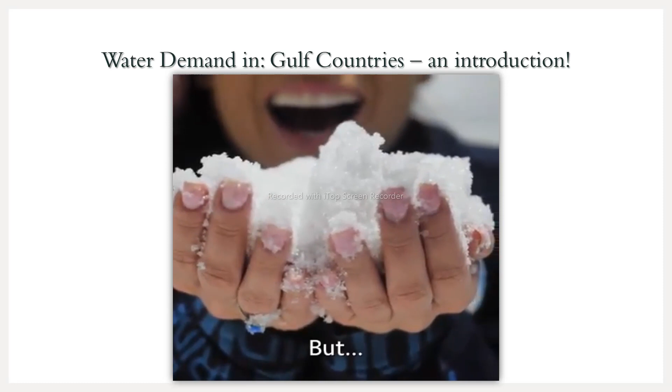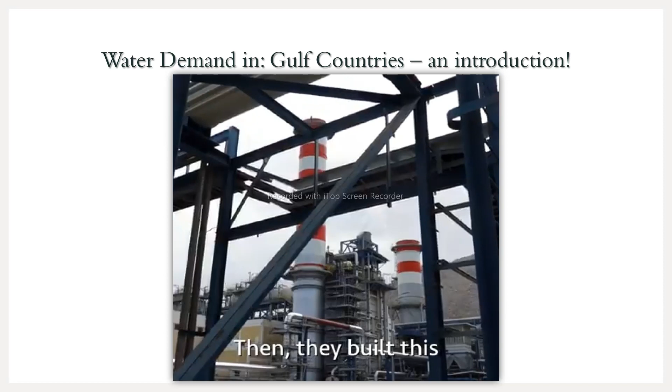This isn't just the Emirates. 99% of the world's water cannot be drunk. It's just too salty or too frozen. But for the first time ever, I want to show you the step-by-step process of how this country found water. The first thing they did is collect the only water they have, ocean water. Then they built this: tens of factories that specialize in one thing, removing salt from water. They take the ocean water, pressure it, and put it through a filter that does not allow salt to enter. Salty water goes in here, and fresh water exits from here.

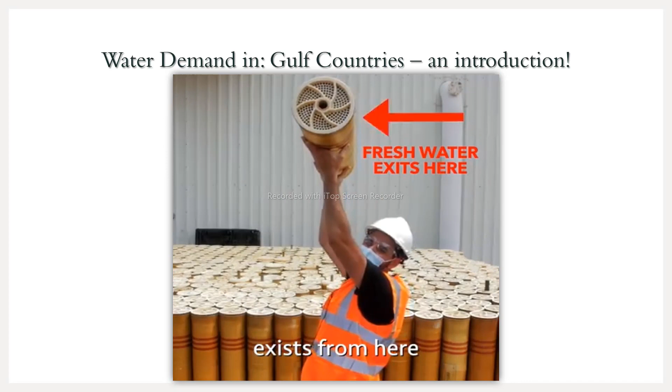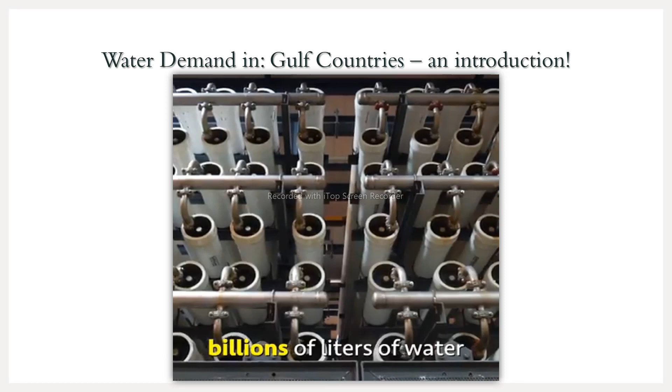This is a crazy complicated process. Every day, not thousands, not millions, billions of liters of water are cleaned this way, entering salty and leaving clean. Now, 90% of the entire country's water comes from the ocean. It is the highest in the world. We're here at a farm in the middle of the desert, and I have this. This water came straight from the ocean and was desalinated in the process, and now you can use it to feed the animals, feed the plants, and it's very cool, very warm, and very drinkable.

That's magic! The next thing they did is even crazier. Instead of cleaning water, they created new water. And this is a true story: they sent planes all the way to the clouds and released salt in the air. They have a lot of it. Because of the salt, the clouds grow bigger and bigger, and eventually they rain fresh water into the country. This is called cloud seeding, and in 2017, they did it almost every single day.

And when that water falls to the ground, they catch it. All the rainwater they collect here by building a huge dam, and this fresh water is what keeps the people alive. I don't think people appreciate this enough. This water is fresh water, rainwater, that was supposed to go to the ocean and become salty. But they caught it before it went to the ocean in the middle of a dam, and they made this lake. Most importantly, you can drink this water.

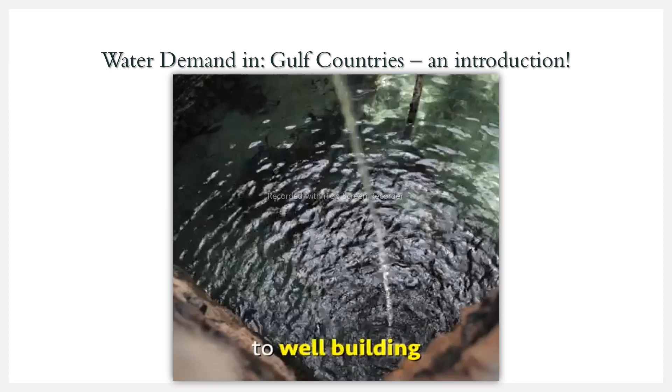From desalination to cloud seeding to dam building to well building, humans are doing the impossible just to find water. And the big idea here is simple: if we have to go and seed clouds and do all this complicated stuff, the least we can do is save water when we can and turn off that water sink.

Okay, so in that video we saw many concepts. I think the audio was audible to everyone. So one concept they told about is cloud seeding.

So where you don't have to treat the water, right? You can directly harvest the water from clouds. There are basically two types of water treatment. That's why the name of the course is water and wastewater treatment. Water treatment comes if you consider a chemical plant or any other plant. Before using the water into that plant, the water must be treated. Mostly the hardness is removed, the saltiness and the ions present inside the water, and also big particles present inside the water are removed. That is your preliminary water treatment.

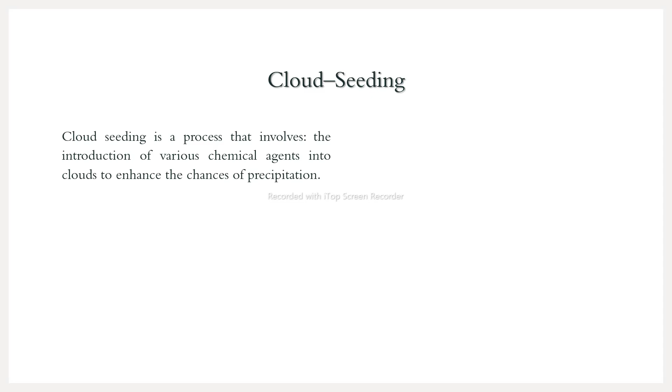So in that video, we saw a thing about cloud seeding. So I'll just ask you a question regarding this. The cloud seeding process is a process that involves the introduction of various chemical agents into clouds to enhance the chances of precipitation. That is your raining.

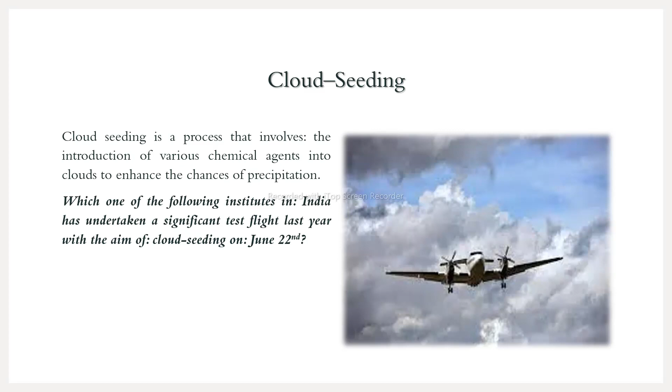So which one of the following institutes in India has undertaken a significant test flight last year with the aim of cloud seeding on June 22nd? Option A is IIT Bombay, option B IIT Kanpur, option C IIT Roorkee, and option D IISc Bangalore.

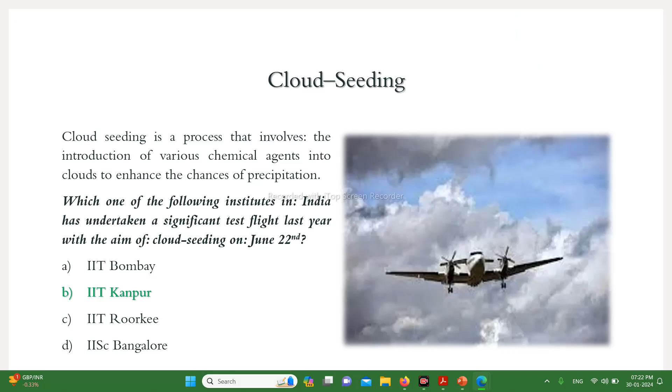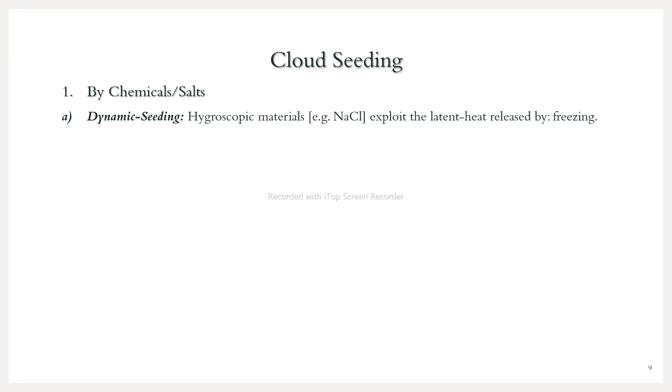So we'll go to our next slide. There is a little bit of information regarding cloud seeding. So it can be done by various processes. One is by chemicals or salts. Within the chemical or salt cloud seeding, there are dynamic seedings, static seedings, and it can also be done by electric charges.

The electric charge technology is what the UAE is using commercially from 2021, though they introduced this technology back in 2017. From 2021 they started regular usage. In this process, drones equipped with payload of electric charge emission instruments and customized sensors are used, flying at low altitudes and delivering electric charge to air molecules for precipitation to occur.

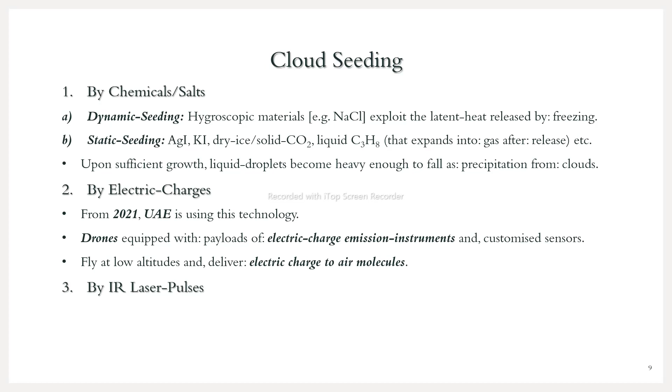Another process is called the IR laser pulse process for cloud seeding. In this process, an electronic laser-assisted water condensation mechanism is directed to the air above. It was first tested in Germany's Berlin in 2010 by researchers of the University of Geneva. These infrared laser pulses encourage atmospheric sulfur dioxide and nitrogen dioxide to form particles acting as seeds, which is why it's called cloud seeding.

The chemical or salt seeding is the most common method. In dynamic seeding, hygroscopic materials, like common table salt, are utilized to exploit the latent heat released by freezing. In static seeding, chemicals like silver iodide, potassium iodide, dry ice (solid carbon dioxide), and liquid propane are used, which expand into gas after release. This way the chemicals are used for cloud seeding. Upon sufficient growth, the liquid droplets become heavy enough to fall as precipitation from the clouds. These are just a bit of information.

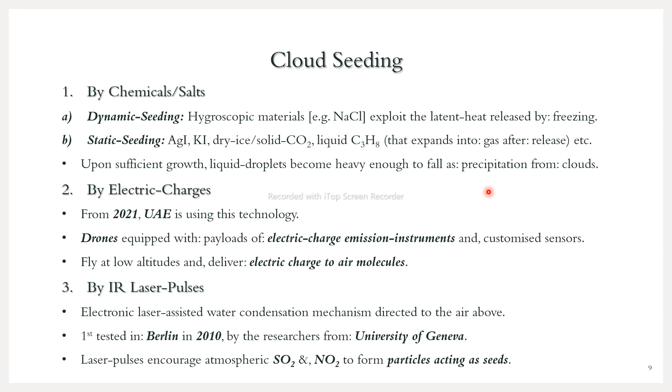So in that video we saw, they told that if we drink too much salty water, you will get dehydrated, right? Salt is also important to maintain the sodium potassium balance of our body, but at the same time the concentration must be tuned to prevent dehydration. So there is a question: which one of the following processes is responsible for getting dehydrated by drinking salt water?

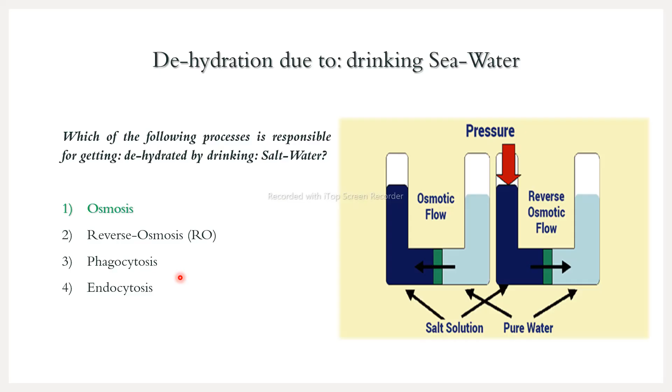But osmosis is the natural process - most of you answered it correctly. So if you put a cell, how does it get dehydrated? This is the natural phenomenon of influx and outflux of water in cells. If water comes inside the cell, it is called pinocytosis. If solid products come inside the cell, this is called phagocytosis. Both are called endocytosis processes, which are in the options. If something, either water or solid, goes out of the cell, that is called exocytosis, just like our excretion process in the human body. So the cell also drinks water, eats solid products, and excretes excretory materials. So what happens if the cell is kept at a higher concentration?

Let's assume it is the membrane or wall of the cell, and let's assume it to be semi-permeable. If the concentration of the outside environment, the salt or sugar concentration, is more than the concentration of the cytoplasm, that is the liquid present inside the cell, then this type of solution is called a hypertonic solution with respect to that cell.

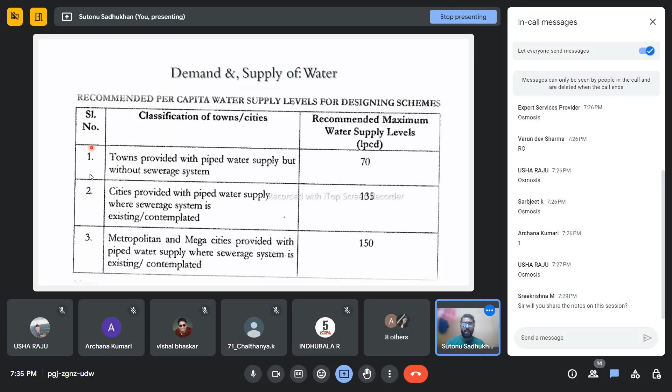Recommended per capita water supply levels for designing schemes is given below. As this is the first session, all the content shared is related to general water treatment processes, and it may not be in a very hard and fast way related to the content you solve in exams or weekly assignments. These are a bit light-hearted, but related to water treatment, and everything will be shared with you, so you don't need to take notes.

Now we'll solve this problem. In the left hand column, classification of towns and cities is given, and in the right hand column, the recommended maximum water supply levels are given, in LPCD, that is liters per capita per day. Number one is towns provided with piped water supply but without a sewerage system. For this type of town, the recommended maximum water supply level is 70 liters per capita per day.

Option 2 is cities provided with piped water supply where a sewerage system is existing or contemplated. This is just an example, not generic data, just provided for solving the problem. For this second type of city, the recommended level is 135. The third type is metropolitan and mega cities provided with piped water supply where sewerage system is existing or contemplated, where the water supply level is 150 liters per capita per day.

You can see the recommended maximum water supply level is gradually increasing as the water treatment and supply facility of the town improves. I mean, the more developed the water treatment facility of the town is, the higher the recommended level of water supply, right?

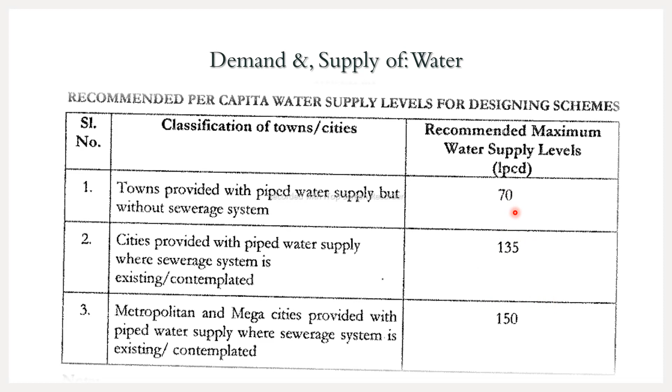So now this is the data provided. Now you have to answer. So the questions will be as follows. So here the type of city is mentioned. City is provided with piped water supply where sewerage system is existing. That means your second type of city, right?

Then the population for a community is provided as 8,000. The source of water is provided as surface water. The characteristics of water to be treated is only suspended and bacterial impurities present inside the water. And the number of working hours of the treatment plant is provided as 18.

Now the questions are, you have to determine the total water demand, water to be sent for treatment, and treatment train with membrane processes. That is, if you use membrane to treat the suspended and bacterial impurities present inside the water, what will be the type of the treatment train with the membrane processes?

And lastly, you have to decide the number of modules required if the flow rate per module is 120 liters per hour, LPH. So there are two units, LPCD, liters per capita per day. Per capita means per head, and liters per hour.

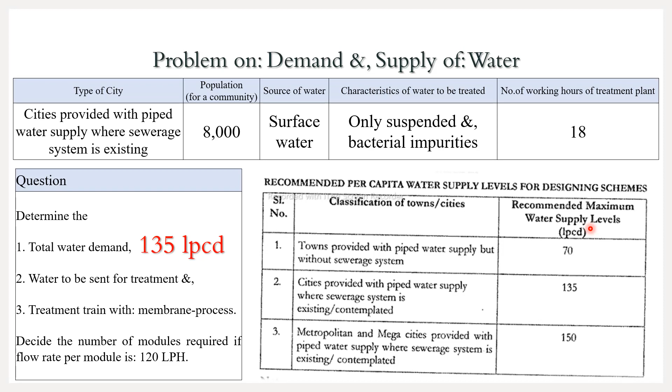So next question, question 2, is water that is to be sent for the treatment. So the total water demand in liters per day. So is anybody calculating? I will wait for you to answer.

So the total water demand in liters per day will be population for a community into per capita demand. So per capita demand is 135 LPCD, liters per capita per day, into 8,000, which is the population for the community. So per capita actually goes out and it becomes liter per day only. You can convert into MLD, that is megaliters per day, by dividing it with 10 to the power 6. So that will be equal to 1.08 MLD, megaliters per day, right? Okay.

Before solving the other questions, we will look into the membrane process characteristics. As stated in the questions, only suspended and bacterial impurities are present inside the water. So to understand what type of membrane treatment to use, we have to look at the different types of membranes and their uses.

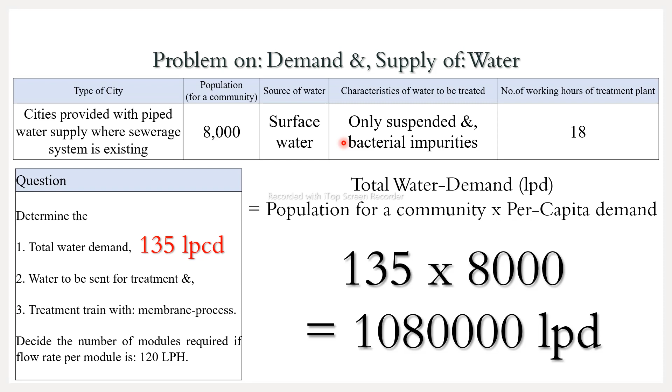Membrane types are basically determined by their porosity. Membrane pores can be in the micro range, ultra range, nano range, or RO range. The term nano means 10 to the power minus 9, and micro means 10 to the power minus 6. Microfiltration membranes have a pore size of around 10 to the power minus 5 to 10 to the power minus 7 meters.

Nanofiltration pore sizes range from 10 to the minus 7 to 10 to the minus 10 meters, that is 1 angstrom. For reverse osmosis membranes, the pore size is below 1 angstrom, or 1 angstrom or below. Ultrafiltration lies in between microfiltration and nanofiltration. Depending on their pore size, their rejection is decided.

The larger bacteria and suspended solids get separated in the microfiltration process. Viruses, bacteria and suspended solids are separated in the ultrafiltration process. So viruses are not separated in microfiltration — if present in the water, you have to use ultrafiltration.

If you want to separate multivalent ions — divalent ions, trivalent ions, etc., like calcium chloride, calcium sulfate, magnesium chloride, magnesium fluoride, magnesium sulfate — these are all bivalent ions, and they cause the hardness of the water.

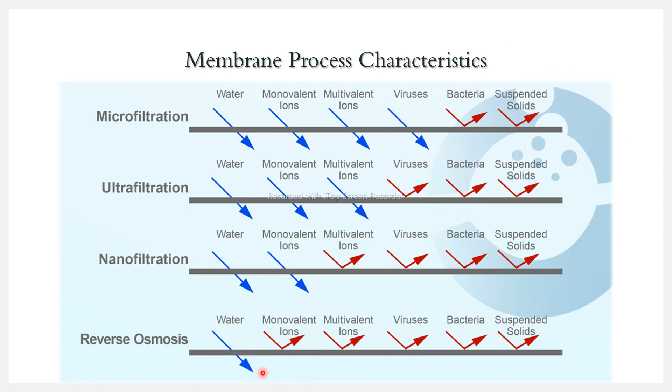Valent, I think you understand pretty well — those with a science background will understand it. But for the general public's sake, we'll discuss these things a little later. Reverse osmosis actually separates all of the things from the water, and only pure water with a very low amount of impurities comes out.

So these are the membrane process characteristics. Now we will be returning to our problem.

We have seen the total water demand is 135 liters per capita per day, and the population for the entire community is 8,000. As per the water balance, as discussed in the week's lectures, the water that goes in also goes out — it will not just vanish. That's why the people will be consuming this water.

If you multiply them, that amount of water will be going for treatment — whatever they consume, the same amount of water is to be treated. If you consider a zero liquid discharge facility, and water is discharged, then makeup water must be taken into the picture. Otherwise, it is not required.

Even if you are not utilizing that water, there are environmental norms that you cannot directly throw used water into the environment, because it will cause harm to aquatic life. That's why it must be treated. Now you have to choose the treatment train with the membrane processes.

Here the source water contains only suspended and bacterial impurities. So can anybody tell what type of membrane we have to use?

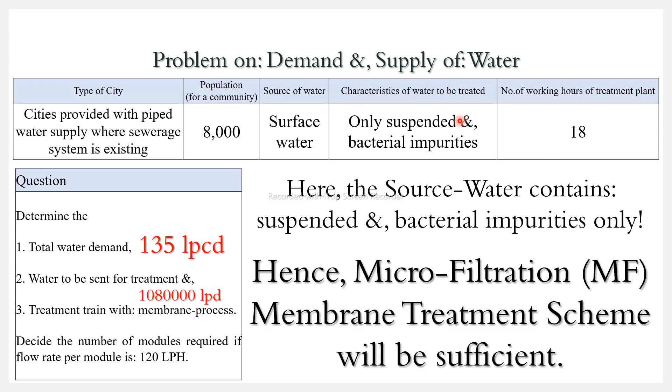So here microfiltration membrane treatment scheme will be sufficient, right? Why we will not use all the things? There are only suspended and bacterial impurities present inside the water, right? So suspended solids and bacterial impurities are present inside the water. Why we will not use ultrafiltration, nanofiltration, or RO, just like the expert service provider said? Why you will not use RO even? So why is microfiltration sufficient here? Can anyone tell this thing?

Unmute yourselves and tell this thing, because all of the processes, ultrafiltration, nanofiltration, and reverse osmosis, as you have correctly said, they separate the bacteria or suspended solids. But why are we selecting only microfiltration here? Any insights?

Okay, no one is coming forward. People are only concerned with things those are specifically in whatever sir told. Not outside that, no one will say anything.

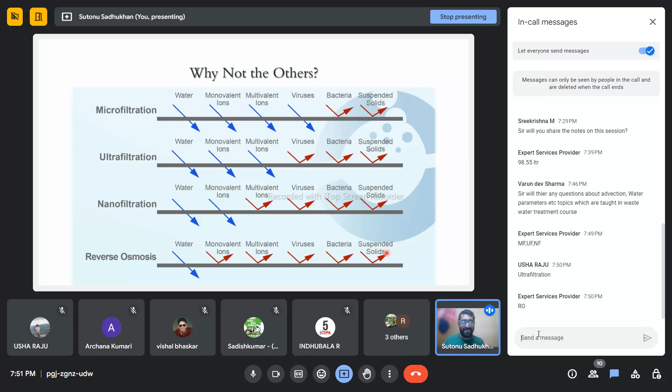Okay, so the reason is that all of the processes basically separate the bacteria and suspended solids, but the other processes, ultrafiltration, nanofiltration, and reverse osmosis, have finer pores, right? So to pass the wastewater through these pores requires higher pressures than microfiltration. Higher pressure means higher energy, that means higher pumping cost, right? And also the fabrication of UF, NF, and RO membranes is costlier than MF membranes. So that's why both the capital costs and the treatment costs, because of the energy consumption, go higher in case of ultrafiltration, nanofiltration, and reverse osmosis. That's why we will use only microfiltration in treating our water, where the characteristics of water to be treated have only suspended solids and bacterial impurities present.

If it was told that also viruses are present, then we would go for ultrafiltration. If they told that we have to separate the bivalent ions also present inside the water, or the hardness measured in terms of calcium carbonate in the water is more than the permissible limit, then we would go for the NF scheme also, that is nanofiltration. But as only suspended solids and bacterial impurities are there, for economical reasons, we will only use the microfiltration scheme.

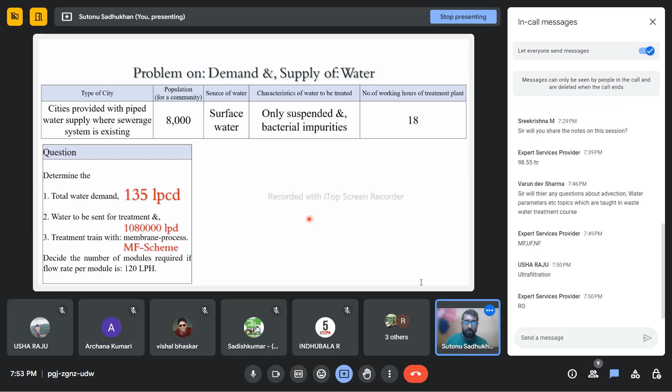Now the last problem of this question is to decide the number of modules required if the flow rate per module is 120 liters per hour. Here, I think the number of working hours of the treatment plant needs to be taken into account. So has anybody calculated it? I'll wait for 2 minutes.

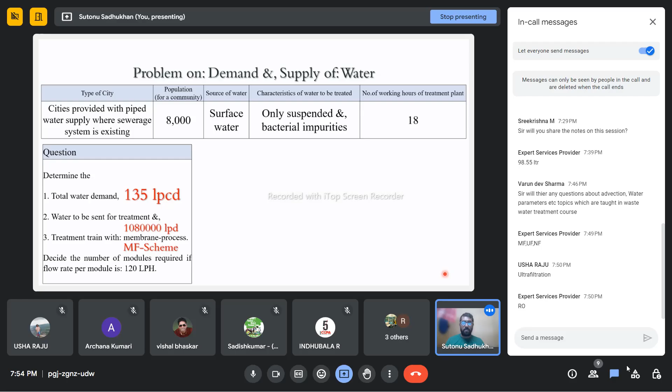Advection, convection, and diffusion, these concepts we will understand, and we will solve questions related to that. So this is the first session, that's why I am just giving you this. In the first time, I didn't give you conceptual things, meaning where you have to remember something. These are only numerical problems. So if you just know the calculation, you can do these things. Just you have to understand the terminologies.

Anyone? Okay, I will give a hint. So data provided is flow rate per module, and you have to calculate the number of modules, that is liters per hour, and it is given as liters per day, and the number of working hours of the treatment plant is 18.

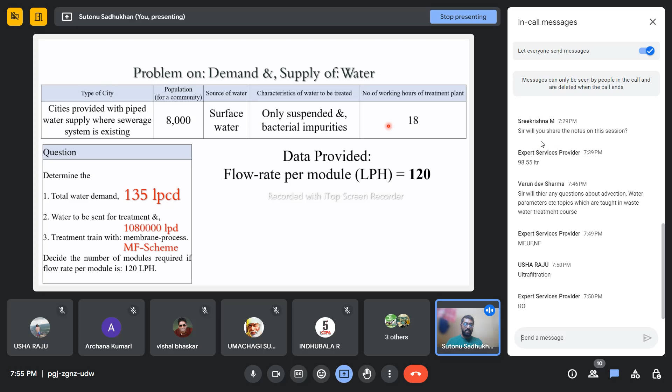So is anybody getting an insight? I don't think so. Another hint: the water to be treated by a single module within the total working hours is 18 hours into 120 liters per hour. That means 2160 liters. One single module will treat this amount of water per day.

And water to be sent to the treatment is 1.08 this many liters per day. I think now it will be pretty clear to everyone. So the actual 24 hours demand needs to be met within 18 hours time only, right? So therefore the total number of membrane modules that has been asked in the question will be simply this 1.08 megaliters per day divided by 2160 liters, equals 500 modules.

And if you consider 5% standby, then it will come out to be 525. What is the concept of standby in any water treatment plant? Either a standby motor, or a standby pump, or any standby membrane module, or whatever the unit operation is. So what is the concept of standby? Can anyone tell why it is required?

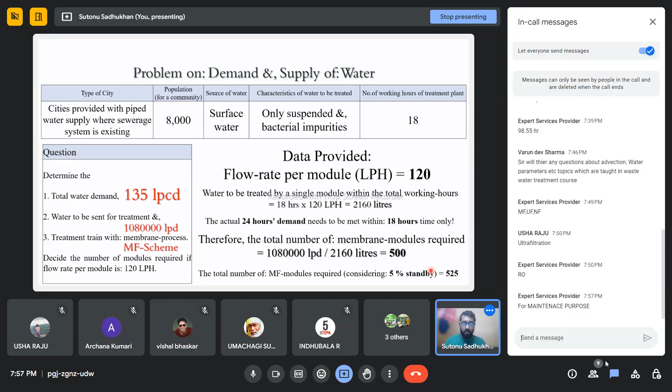So let's say the water, the raw water or the wastewater, is coming, and there is one raw water pump, or there may be one sludge pump, or there may be another type of pump which is pumping the water into your system of treatment trains.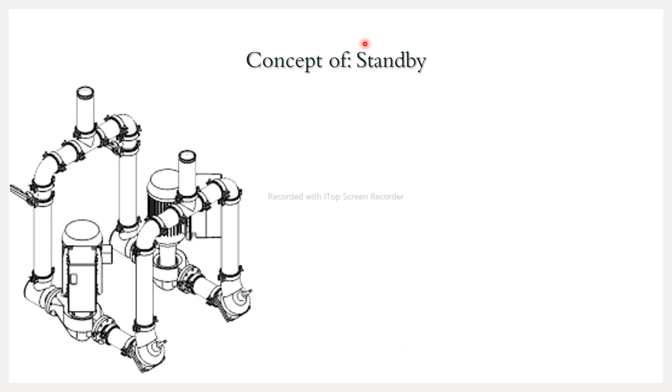And this pump needs maintenance, definitely that is the major reason. Also this may get damaged. How will you understand the damage? In the suction side or in the discharge side, there will be pressure gauges, or there may be online pressure gauges also. The difference, that is the delta P of these pressure gauges, will be fixed in a continuous plant. But if you see a variation in this pressure delta P, then you will understand that there is a certain problem in the pump that either needs replacement or needs maintenance, or maybe certain impurities have jammed the impeller, so that's why the pressure drop is increased, or many other reasons may be there.

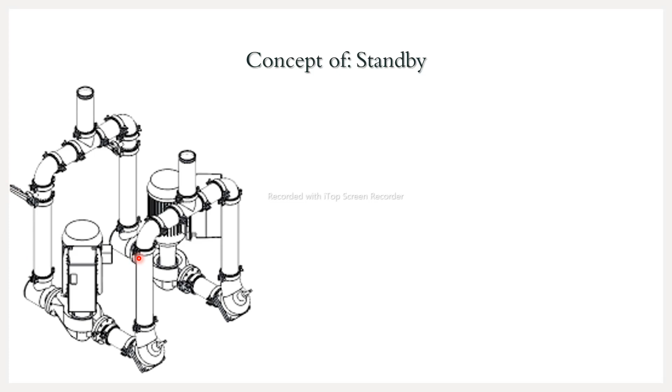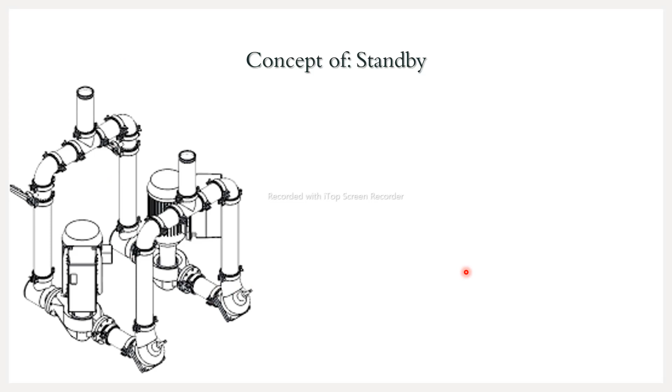So that's why you need to actually check or maintain. So what happens at that time? There is one parallel pump which is called the standby. There are two isolation valves. Those valves will get closed and it will isolate the water circuit, and the other valve will get opened. So that's why the water will go through this circuit, and the other circuit will be used for maintenance. So this is the concept of standby, so that the pump operation, the water treatment plant operation, doesn't get stopped. That's why to maintain continuous operation, the standby concept is there.

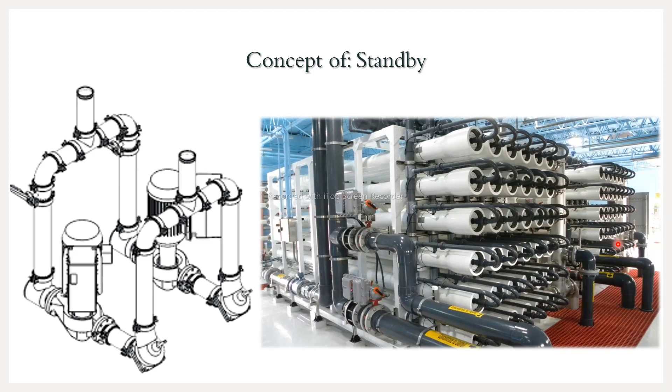In case of membrane modules also, there are certain modules, and a certain number of other modules as the standby. So there you can see there is one online and the other one is in standby mode. If one is in operation and the other one is in maintenance, membranes after certain times get fouled, so they need to be cleaned. At that time, the other standby module, the standby train, actually becomes operational, and the other one comes under maintenance.

Okay, so the answer to the fourth question is 525, if we consider 5% standby.

Now one bonus question for you: if one microfiltration train contains 25 modules, calculate the number of microfiltration trains required. So what is a module and what is a train? The concept is very simple. If you consider one membrane train, it consists of several stages, like stage 1, stage 2, stage 3, and within each stage there are different modules. So more than one module makes one stage, and more than one stage makes one membrane train. So the modules are kept in parallel, but across different stages the modules are in series.

So what is the utilization of these stages? Basically, feed water comes in and concentrate goes out, and filtered water, the permeate, comes out. So after the first stage, whatever concentrate you are getting, you further separate it to make the process economical. So you are getting more and more permeate, and the concentrate is getting more and more concentrated. That is the concept of stage basically.

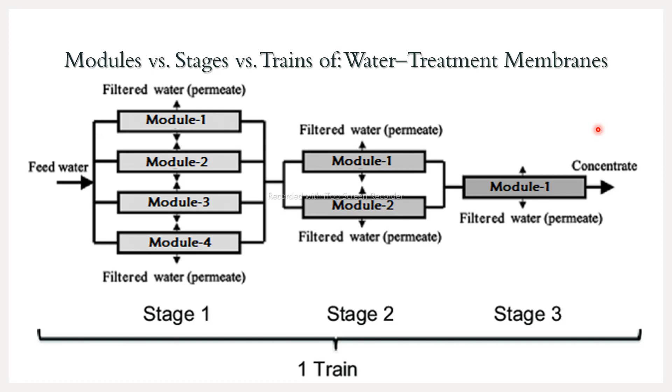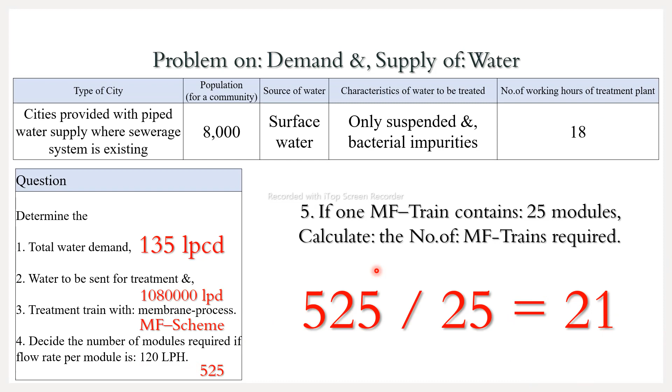So now, if one membrane train contains 25 modules, then the number of trains will simply be 525 divided by 25, which is 21. Simple problem.

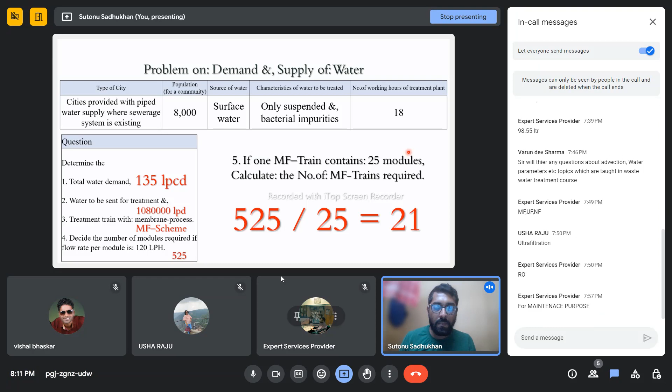Okay. Even so, NPTEL courses are actually not designed for a highly educated class or research class of people. These are designed for common Indian people, and common people all over the world who understand the English language. They can attend this course and make themselves educated, and enhance their understanding of science-based and non-science-based subjects. So these are targeted for a general audience. So even if you are unable to understand whatever questions you're having in your mind, you can always ask. It is highly encouraged.

And the temperature provided here, these are basically isotherms, T1 and T2, indicating that the flow is from the lower temperature to the higher temperature direction. There is one reason why: the more the temperature, the less the concentration of gases, or that is your liquids. Excuse me sir, is this temperature or time? T1 and T2?

The question is you have to determine the type of mass transport. My question is whether T1 and T2 indicate time or temperature. It can be either - both things are correct. If you consider them as time, that is also correct, and if you consider them as temperature, that is also correct. The temperature effect will not be there in graph 1, but in the other graphs there will be temperature effects. But as time, it is also correct, because T2 is greater than T1. You see the profile at lesser time on the left hand side, and as more time passes, you see the profile at the higher flow side, that is in the direction of flow. If you consider an element of fluid flowing through the path, you will see how the flow pattern or profile changes as time evolves. So both are correct, but you have to determine the type of flow based on the profile - what type of fluid flow is this?

So you have to choose from the correct options given below. This is graph 1, graph 2, and graph 3 - these are flow profiles. Option A: graph 1 is advection, graph 2 is diffusion, and graph 3 is advection and diffusion. These are concentration versus distance profiles, so it doesn't matter whatever you consider - the concentration versus distance profile alone gives you the answer.

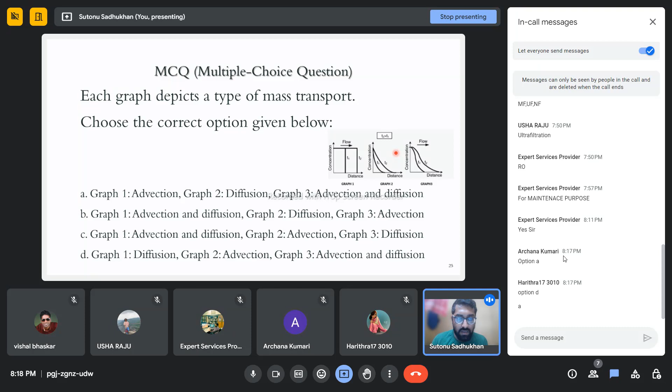Option A, okay. Archana and Harithra have told option A. I think it is the correct answer only, but we will see.

Someone has told that T is the time, so I think it is more general. If you consider temperature instead, the flow can be flipped.

Some species, instead of decreasing concentration or volume with increasing temperature, have density behaviors that actually change. For example, water—if you heat it up to 4 degrees centigrade, instead of decreasing its density, it will increase in density.

So if you consider it as temperature, it will be a more specific case, but if you consider it as time, it will be the more general case. True, but nevertheless it is immaterial—the importance of T here is basically to confuse you. Even if you remove the T, you should be able to answer.

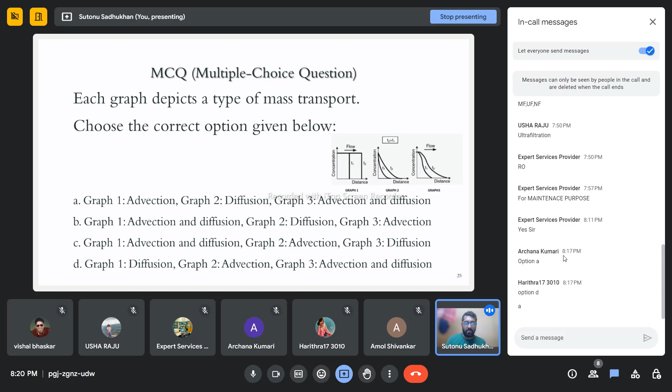Okay, so I know what is coming forward. We'll go with the answer—option A, the two of you have told it correctly. So graph 1 is advection, graph 2 is diffusion, and graph 3 is advection and diffusion.

You can see this is diffusion, and both the effect of advection and diffusion is there in the third graph—that's why it's advection and diffusion. Here you can see the change in concentration with respect to distance in case of diffusion, because in diffusion, flow only occurs from higher concentration to lower concentration. That's why the concentration changes over the distance, because flow is occurring over the distance.

And here it is a coupled effect. But in case of advection, you see that there is a plug kind of thing flowing, right? So it is not changing over the distance—the concentration is remaining the same.

In a particular concentration, you can see it's called a pulse kind of thing. Over a particular distance there is a sudden change in concentration. If the graph is stepwise, it will be a sudden change, and if it is not so, it will be kind of plug flow.

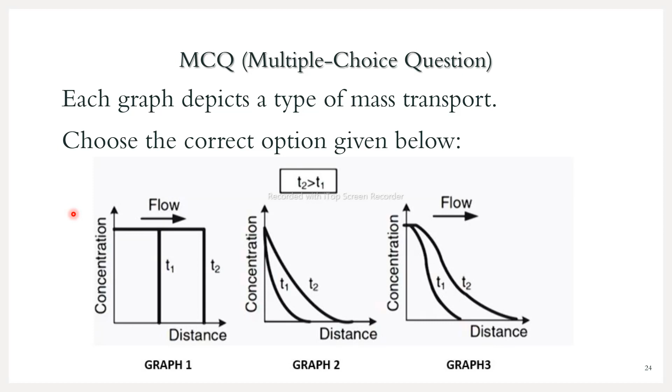In heat flow case, the heat is being transferred by the motion of the particles. In our water flow case, that particular species - salt, bacteria, or other pollutant, heavy metal, etc. - is being transported by the motion of the water particles. That's why people tend to confuse between convection and advection.

But what is the basic difference? In convection, there is one thermal component - a thermal gradient is there. So by heating, the density decreases as intermolecular gaps become larger. So local elements of the fluid become lighter and they flow up, and the heavier, cooler element comes down. In this way, the thermal component actually catalyzes the flow of a particular property from one region to another.

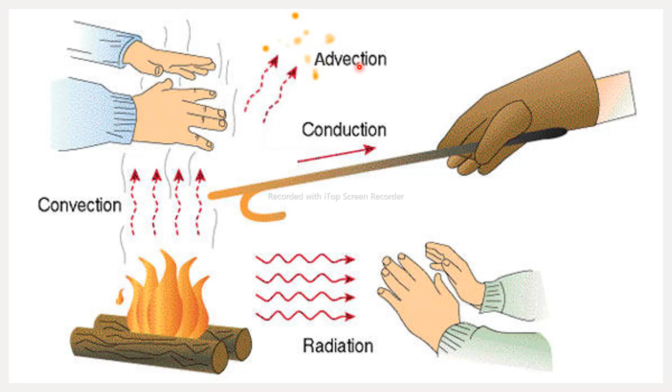So though it is flowing from higher concentration to lower concentration, the reason for the flow is because of the bulk motion of the particles in the absence of any thermal gradient - absence or presence is immaterial. Thermal gradient is not participating in the flow of the particles - that is called advection. Though sometimes they are synonymously used, there is a bit of difference between them.

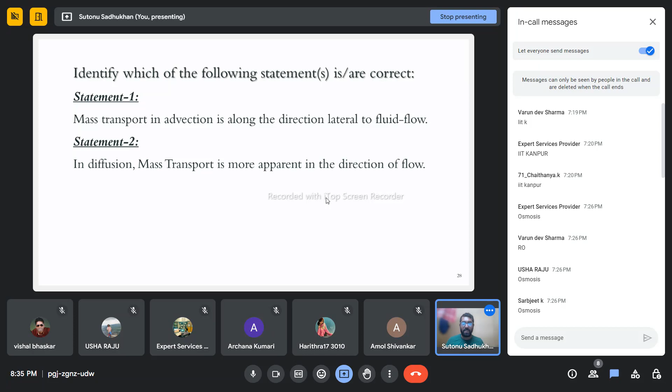Both are wrong, both are wrong. Any other response? I mean, I am not telling you correct or wrong, I am just asking if anyone has a different opinion, or if everyone is okay with it. I am okay with your answer.

Let's see. As I said earlier, it is always easier to understand the concept using fluid flow in a pipe. So if there is flow of fluid or liquid in a pipe, or maybe it may not be a pipe, it may be a flat sheet with space in between, and fluid is flowing through that space. It may not be circular in nature.

In both cases, the cross sectional flow will basically be parabolic flow, because the fluid has certain drag - there are wall frictions and layer by layer frictions. That's why the element of the fluid at the central region will be ahead as compared to other fluid elements near the wall. So the fluid is flowing like this way, and now what should happen?

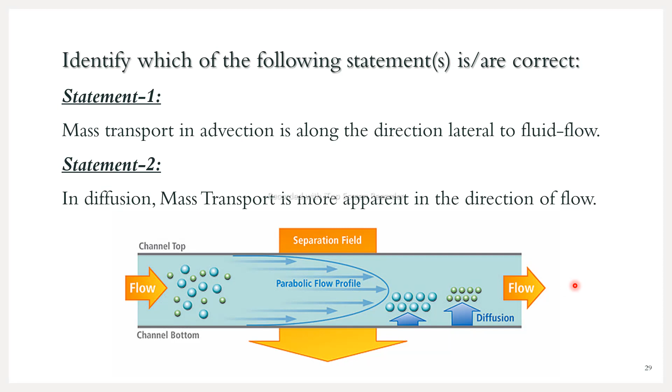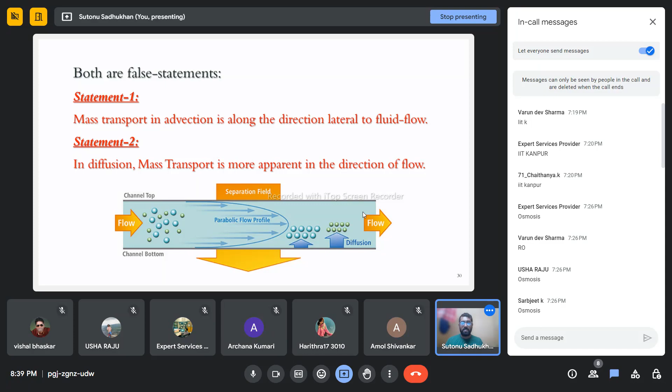I hope you are able to imagine the picture, and this falsifies the second statement also. So both the statements are false, as someone has correctly said. Hope this is clear, the concept of advection and diffusion, I think.

So for example, if there is simultaneously a flow in the x direction, a flow in the y direction, and you are also heating the surface, then because of the heating there will again be a component of fluid motion inside the channel. That will contribute to the flow of these species also, due to the bulk motion of the fluid, caused by thermal or density differences of the fluid.

That is called convection. So because of mechanical motion or thermal motion, sometimes the bulk flow due to mechanical and thermal effects are clubbed together as thermomechanical, and their contributions along with convection and advection terminologies to the mass transfer coefficient are actually clubbed together.

So sometimes they are clubbed, not sometimes, most of the time they are clubbed, to make the design easier basically. Or what happens in most cases is that there is either the thermal component or the mechanical component; both components generally are not present, so it depends case to case. But the diffusion component will always be different, and will have its distinct contribution in the calculation of the mass transfer coefficient.

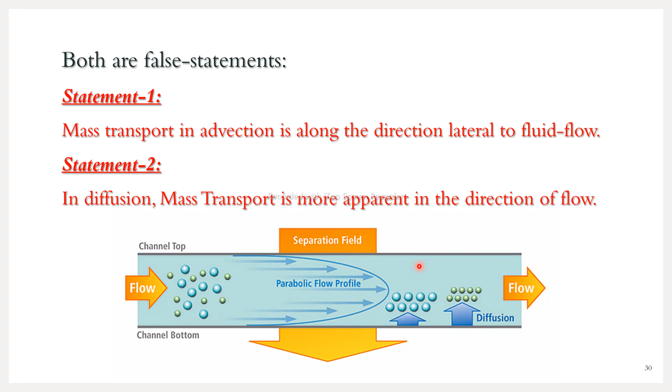Okay. So now, the separation field which was there in the earlier picture, that was not relevant for now, for your current assignments. That will come later.

Molarity versus molality versus normality - these three concepts I will clarify before proceeding to our next problem. So can anybody from the audience say what these three are, or I'll just proceed with the definitions.

Molarity is the number of moles of solute in 1 liter of solution. Normality is the number of gram equivalents of solute in 1 liter of solution. And molality is the number of moles in 1 kg of solvent. Yes, definitely, you are correct.

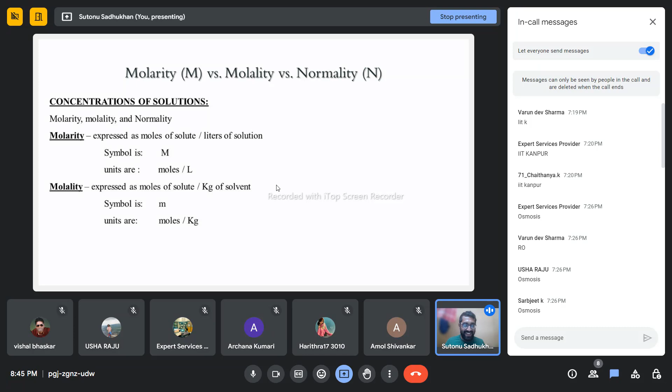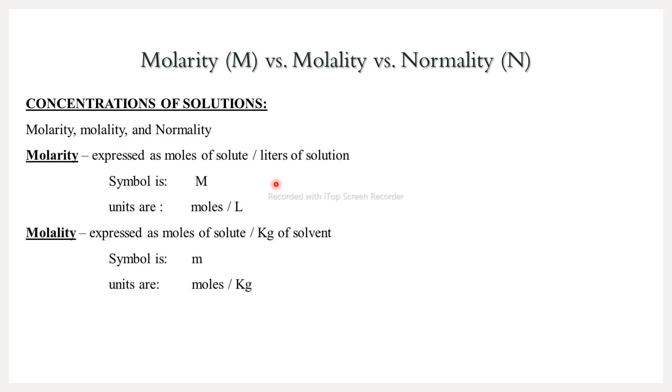For the other audience, I will repeat what he just said. Molarity is expressed as moles of solute per liters of solution, symbol capital M. Molality is small m, expressed as moles of solute per kg of solvent. And normality is gram equivalents of solute per volume of solution in liters.

So now, if you consider water, what is the density of water? Water density is basically 1 gram per cc, which means 1 kg per liter. So in water, if the solution is dilute - meaning the species dissolved inside the water is not contributing much to the total mass of the solution - in that case, sometimes molarity and molality will be interchangeable, and normality will also be equal.

If you see, the valency is 1 - we'll see what is the normality, what is the gram equivalent weight. But it changes, the equivalent weight changes when the valency is more than 1. So we'll see it with an example.

Let's say we take the compound calcium carbonate. The molecular weight of calcium carbonate - atomic weight of calcium is 40, carbon atomic weight is 12, and oxygen atomic weight is 16. So 3 into 16 is 48, plus 12 plus 40 is 52. So 52 plus 48 becomes 100 - that is the molecular weight of calcium carbonate. Molecular weight means 1 mole of calcium carbonate is 100 grams.

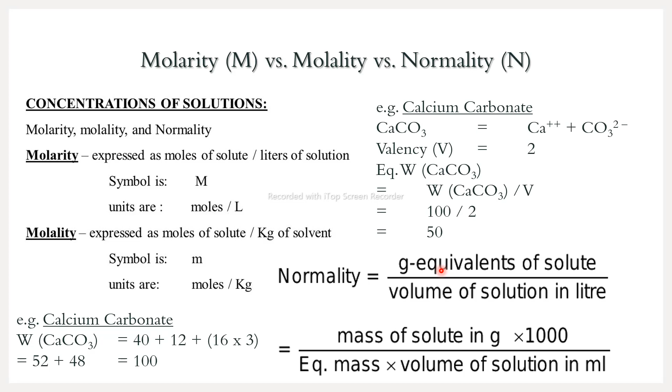The concept of molality and normality, if someone is not from a chemistry background... I am also not from a chemistry background. I just did my chemical engineering in BTech and MTech. In my first year, these things were there.

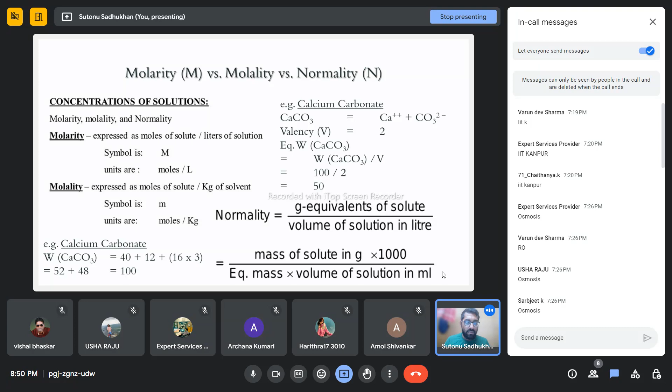Okay, I think everybody is clear with that. Now we'll proceed with our problem.

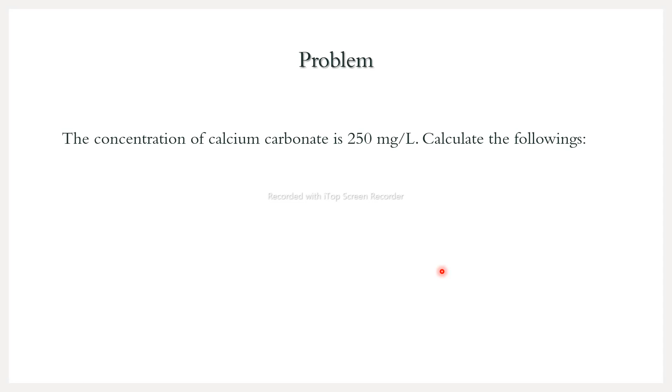The concentration of calcium carbonate is given as 250 milligram per liter. You have to calculate the following: Number 1, concentration in ppm. Number 2, equivalent concentration, that is not molality, it is milliequivalent per liter unit. Number 3, concentration in parts per billion, ppb unit. And number 4, molar concentration in millimolar unit, that is millimoles per liter. So these 4 you have to calculate.

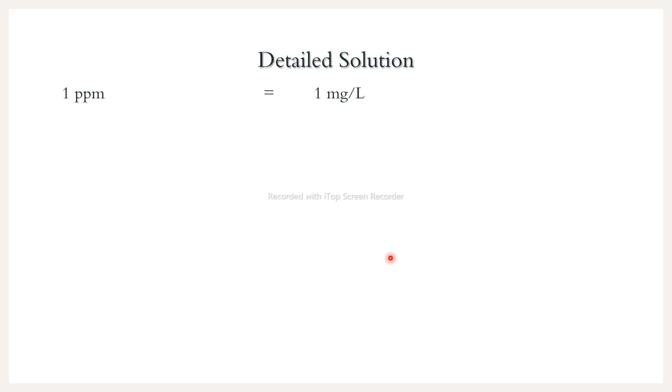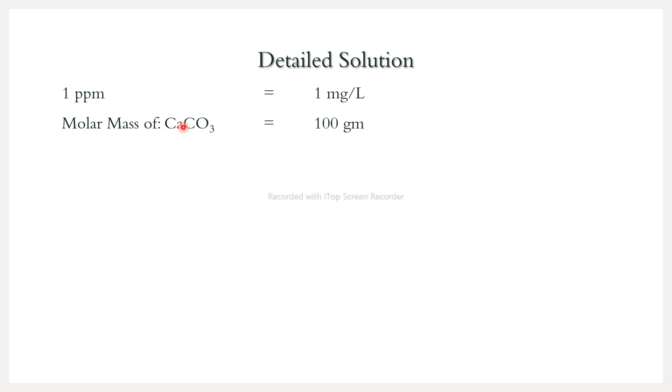Okay, so we'll go with the solution of the second problem. As we calculated earlier, the molar mass of calcium carbonate is 100 grams. If someone has doubt regarding atomic weight etc., they can unmute themselves and ask, otherwise I will assume they have studied it at the 10th level, what atomic weight and atomic number are. So utilizing those concepts, the molar mass is calculated.

So the atomic weight is 40 in case of calcium, carbon is 12, and oxygen is 16. The equivalent weight is calculated using calcium as it is 2 plus, so that's why it is divided by 2, dividing the molar mass by 2.

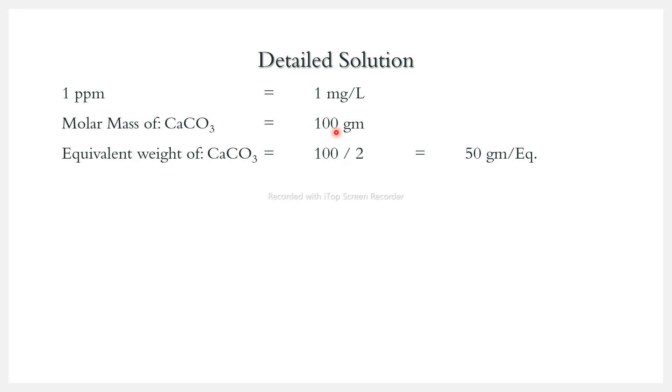So 100 divided by 2 comes to be 50, and the data given is 250 milligrams per liter. 250 milligrams means 0.25 grams per liter. The equivalent weight is 50 grams per equivalent. If you divide 0.25 grams by this 50 grams per equivalent, the gram cancels out and the unit becomes equivalents per liter, which means 0.005 equivalents per liter. That is your concentration in equivalent per liter unit.

Now the question has been asked in milliequivalents per liter. Milli means 10 to the power minus 3. So 0.005 means 5 into 10 to the power minus 3 equivalents per liter. That means, since 10 to the power minus 3 means milli, that is 5 milliequivalents per liter. So the answer is 5.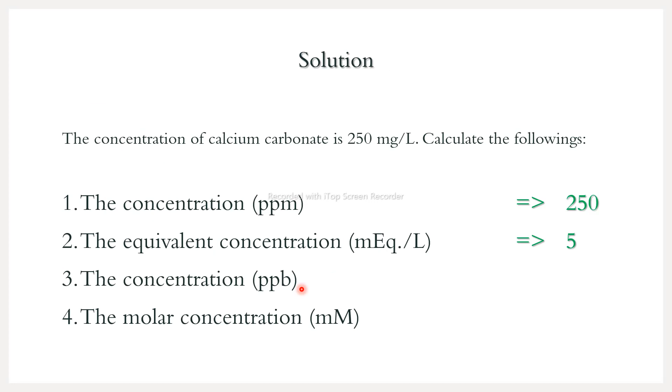Option 2. Now option 3, you have to calculate the concentration in parts per billion. In our traditional Indian unit system, there are ekok, doshok, shotok, hajar, ojud, lokho, nijud, koti. The nijud comes before crores, in between lakhs and crores. So nijud means million.

And billion means 1000 million, so 1 ppm is 1000 ppb. That means 1 milligram per liter is also 1000 ppb. So in case of parts per billion, the concentration will be 250 into 1000, that means 2,50,000. Hope it is clear.

So now you have to calculate the molar concentration in millimolar unit. 1 mole is 100 grams - and 1 mole is not a generic term, right - 1 mole of calcium carbonate is 100 grams in our case, and 1 millimolar means 10 to the power minus 3 molar, that is 10 to the power minus 3 moles per liter. Now you compare between these two: 250 milligrams per liter and 10 to the minus 3 moles per liter. Then you will be able to calculate the concentration in millimolar unit.

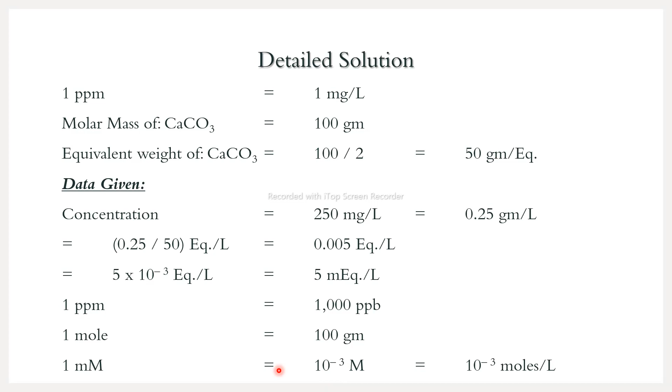That means 2.5 into 10 to the power minus 3 moles, that is 2.5 millimoles. So in terms of millimolar, the concentration will be 2.5. I hope all the four are clear to everyone.